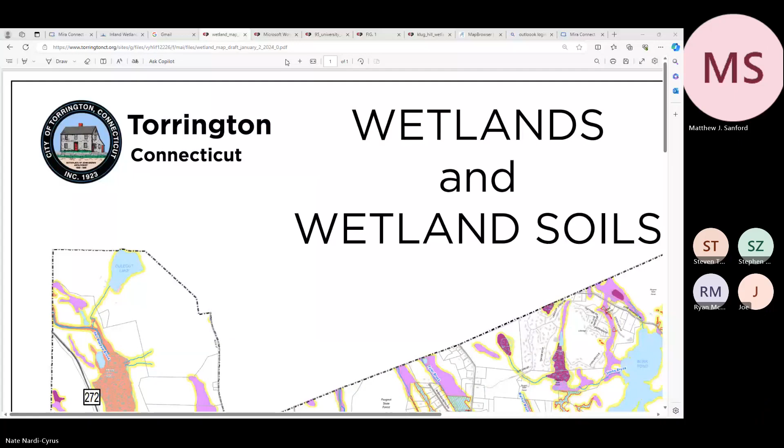This wetlands map has state mapped wetland soils. It also has wetlands mapping done by private consultants that were digitized into our wetlands layer, and the upland review area digitized in yellow as a 100 or 75-foot buffer. So this is the total regulated area of the municipality.

Nate, we could previously see it online, but we can't now. If you can show us after, then we can take a look. I'll figure out how to share it. It's been changed, could be anywhere. Can you see it there? Yeah, that's it. If they can see it, we can. I'm going to fix that. We can discuss it. Have we seen it? Yeah.

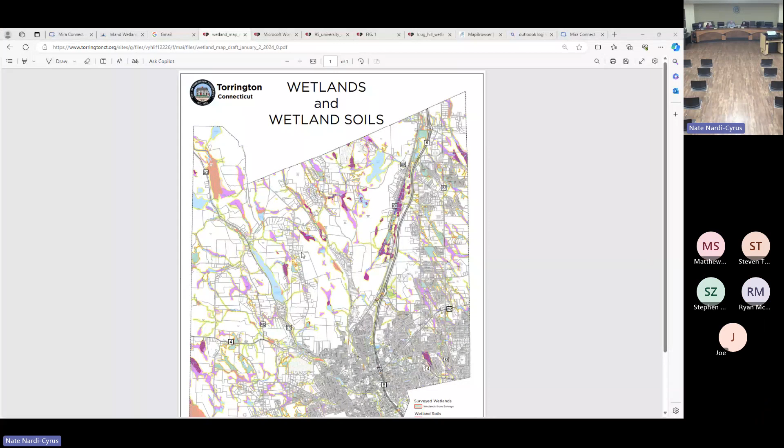How much has been changed on it? There's just been a few updates. We've added the larger wetland mapping done for the Klug Hill campground on these two parcels here. As we go through documents in the land use office, we refer it to our GIS department and they hand digitize using those original maps. There's quite a few smaller ones - these little tiny ones here, to give you an idea of the scale. But it's just a few, I can't think of any others.

How often do they have to be updated? It's good to do an annual update just to get everything on our official map, but sometimes it goes a few years before they're updated.

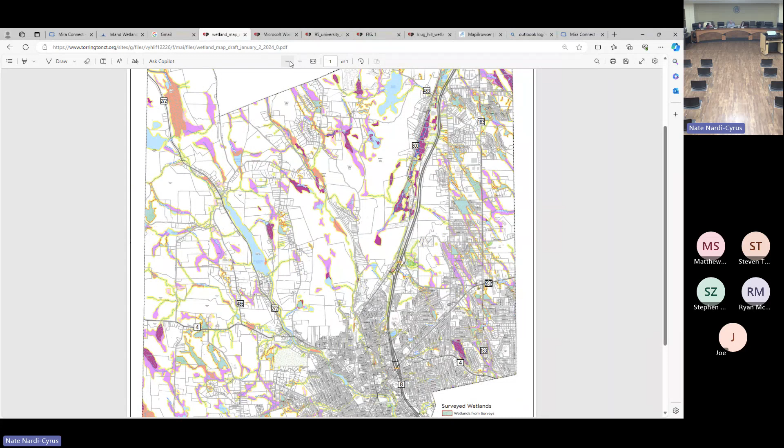Any comments from anybody at all? Okay, can I have a motion to approve? Do we have to close the public hearing first? Yeah. I move that we close the public hearing. Second, all in favor? Christine, aye. Adrian, aye. Joe, aye. Randall, aye. Stephen, aye.

Now can I have a motion to adopt the new map? I move that we adopt the new inland wetland map for City of Torrington. Second, all in favor? Christine, aye. Adrian, aye. Joe, aye. Randall, aye. Steve, aye. Motion carries. That's all set.

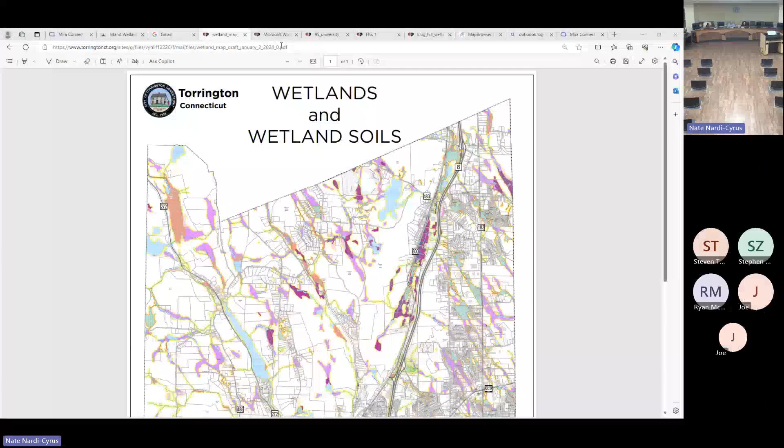Next is old business: Applicant Alfano Group LLC, location 87 Eagle Ridge, activity modification to redesign approved restoration plan. Mr. Alfano came to the last meeting in January and presented a modification changing boulders, used as a demarcating area for the wetlands, to native shrub plantings. There weren't any questions from the commission, and in my memo I was supportive of it. This is just an amendment to an existing permit - the rest of the existing permit prescribing plantings within these areas and signage marking holds, but this is a modification replacing boulders with native plantings. I don't think we had any issues with it. I guess the question is what's going to happen to the boulders now?

Okay. I don't have any problem. Anybody else have any comments?

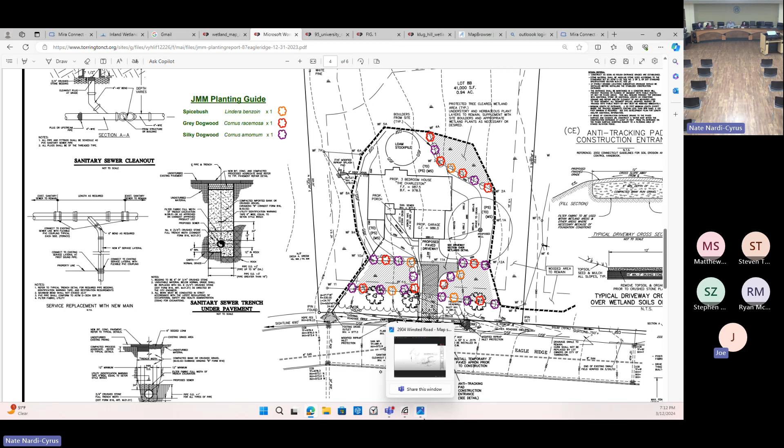I have a motion to approve. I move that we approve the Alfano Group LLC, 87 Eagle Ridge, modification to redesign approved restoration plan. I'll second that motion. Joe, I think Joe's trying to say something. I just said I'll second that motion.

Okay, all in favor? Christine, aye. Adrian, aye. Joe, aye. Randall, aye. Stephen, aye. Motion carries.

Next, old business. Applicant James Mazzarelli, location 137 Babbling Brook Road, assessor map 221, block 003, lot 054. Activity: piping of 130 feet of water course, creation of armored ponds before and after pipe stream, and backfilling of adjacent wetlands to extend lawn.

This is a clarification of motion conditions. This was approved using a specific map that the commission went back and forth on a few times, but ultimately decided on a specific map to approve. The only thing I wanted to bring back to the commission was that we didn't specify the conditions in the memo I provided, which include a shortened time frame, usually recommended for restoration activity, a 2-year permit, and the marking of those wetlands with markers. The commission didn't say that shouldn't be the case, but I wanted to get a clarification on the record of what everyone was looking for, and whether they wanted those specific conditions in the memo.

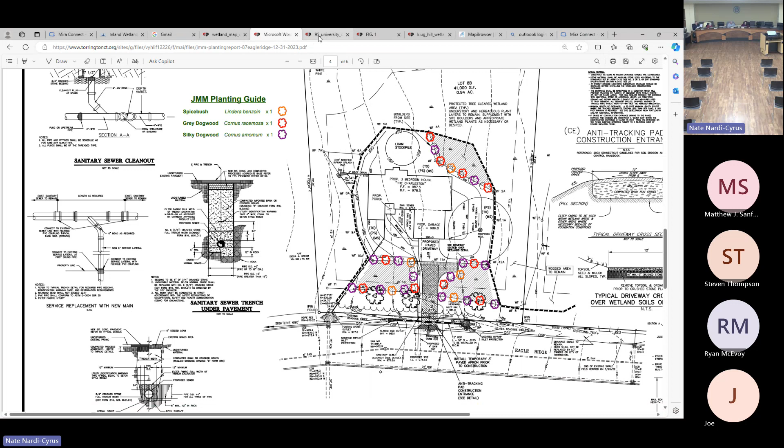Next, new business: the Torrington Water Company, location 95 University Drive, jurisdictional determination for restoration of banks at the dike at Allen Dam Reservoir due to 2023 flooding.

This is a jurisdictional determination for the Torrington Water Company. They had a washout shown here on the map. You can see where the stream takes that 90-degree turn, and it jumped the 55-foot existing masonry wall, washing out sections and undermining the berm that holds this drinking water reservoir for the Torrington Water Company. My recommendation is to determine that it's an as-of-right utility use exempted from permitting from inland wetlands.

I move that for applicant Torrington Water Company, 95 University Drive, jurisdictional determination for restoration of banks at the dike at Allen Dam Reservoir due to 2023 flooding, is an as-of-right use.

Have a second? I'll second that. Joe, two seconds. Okay, all in favor? Christine, aye. Adrian, aye. Joe, aye. Randall, aye. Stephen, aye. Motion carries.

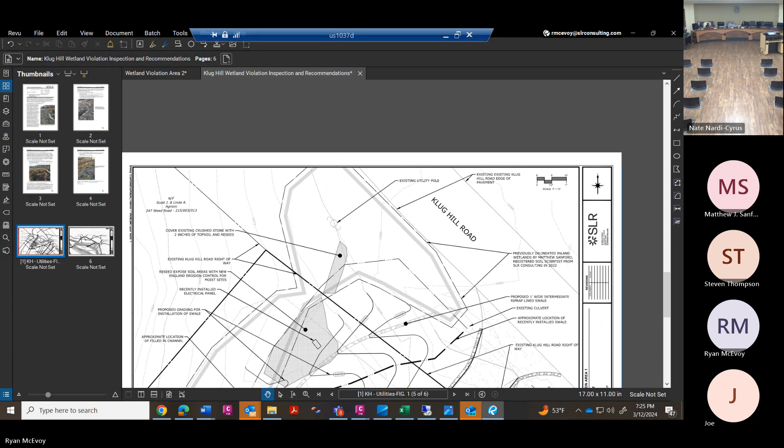So the second area is a little more straightforward. This is by Stormwater Basin 310, a little to the west of the site, centered to the property overall. The silt fence was placed in the wrong location, partially in the wetland area. As part of this corrective action, we relocated the silt fence, upgradient of the wetland areas. There wasn't any soil disturbance in that area.

There was some vegetation removed, but no soil disturbance. So this one was really just moving the silt fence out of the wetland area and leaving the vegetation that's in place to grow.

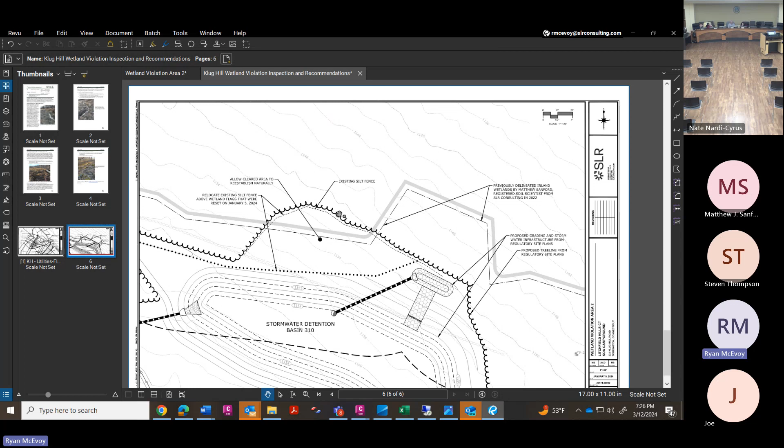And lastly, there is an area that had some S&E erosion problems, downgradient of a basin. There wasn't an issue with clearing or any intentional site disturbance, but all the rain we had in December and January resulted in a silt fence being overwhelmed and some light areas of sand and sediment deposits occurring in the wetland, which needs to be raked out to remove it from the wetland areas.

So we have Matt Sanford on the call as well, if you have any questions regarding the nature of the wetlands themselves.

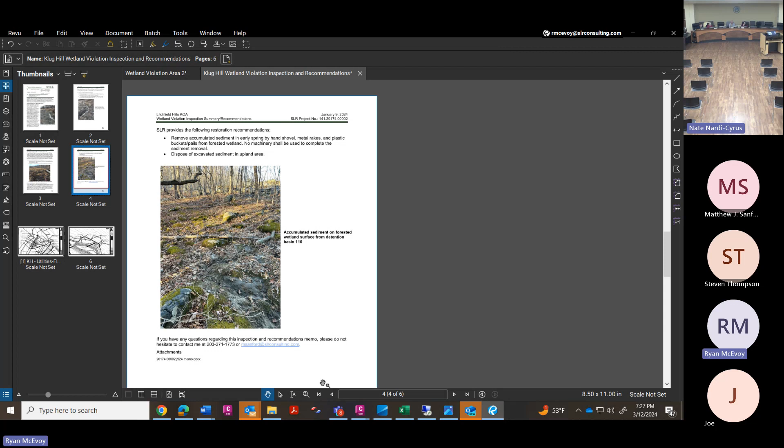Do you have any more pictures? I see this one picture you just showed. Do you have any other pictures of the watercourse?

Yeah, this picture right here in the packet that we submitted is violation number 2, where the silt fence was put too far, in this case to the right. The silt fence should have been a little bit more to the left where my cursor is.

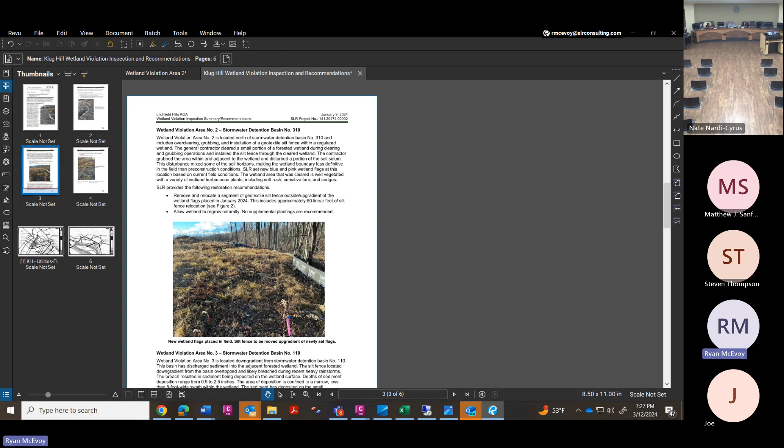So this area hasn't really seen any activity, any grubbing, any soil disturbance. It's really just some trees that were cut down that were permitted to be cut down. And in the area of the

watercourse that was relocated, this represents where the diversion ditch was placed by the site contractor. This is in upland soil areas. And the old ditch was this particular swale over here.

So the ditch, and Matt can go into detail on this, is not being impacted by the relocation of the surface runoff that comes through this area. This is all a groundwater fed wetland area and has contributing groundwater shed from adjacent properties and from the site itself. So the relocation of the ditch in and of itself does not result in any detriment to the actual wetland.

The clearing done or the disturbance of soil for the electrical conduit is proposed to be replaced with topsoil and appropriate seed mixes for the type of vegetation on site.

So what happened with this watercourse? Was the water coming down? Was it disturbed originally, and that's why it came down and washed everything out, and that's why the street department wanted it moved? Well, I don't know if this was historically a problem or not, but this watercourse here comes into an area by the road that doesn't have a lot of grade change.

Is there any reason to believe that after construction is finished, that swale would take on more water flow? No, it's all coming from the same source up-gradient, draining down to the same source down-gradient.

Nate, I'm looking at this map, I'm still a little confused. The dark line is the approximate location of the recently installed swale. And the light one in the middle, farther up, is the proposed one-foot-wide intermediate riprap lined swale. That's correct. So this is the one that was proposed by engineering. So this is the one proposed. That's the one they have now.

City engineering. Yeah. This is the one that was decided on by the site contractor and Public Works. I think it was the street commissioner, but I'm not exactly sure who at Public Works identified this as the place where they wanted it. But when we submitted this application for review, the city engineer suggested a different approach or a different path for this swale. So it's shifted a little bit more.

So you can't really see it too well on the screen, but the ditch today, as it's reconstructed, discharges immediately adjacent to the inlet of the culvert. So I think the city engineer's concern was that this would eventually cause erosion right at the inlet of the culvert, if it's so close to it.

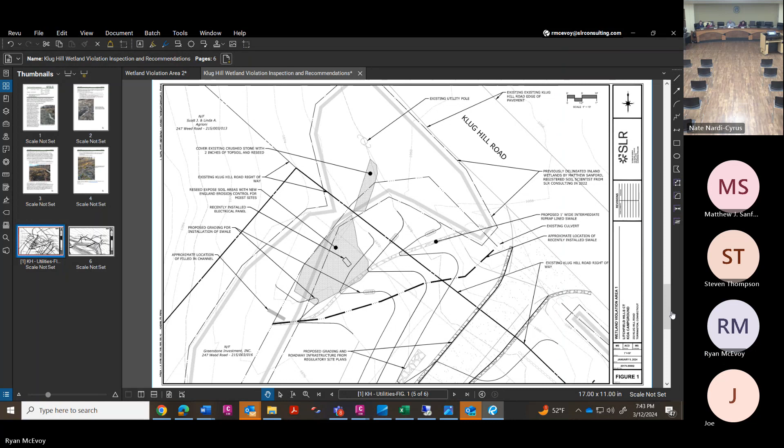Okay, next: cease and correct order. Order to show cause in the wetlands permit violations, location 2904 Winsted Road, assessor map 243, block 002, lot 010. Owner DJF Investments LLC, Daniel Fragale, principal.

This just came up during regular inland wetlands permit inspections. This permit was issued prior to me coming on, but in inspecting, you have on the screen the permitted plan. I noted that the pipe was installed, but the length of that pipe, instead of the 86 linear feet proposed in the plan, was closer to 125 feet. And the compensatory wetlands restoration that was also conditioned with the permit did not appear to be installed. So I issued that just to bring Mr. Fragale back for the commission.

Anyone here on this? No one's here for Fragale to speak on this? I didn't hear anything from the office.

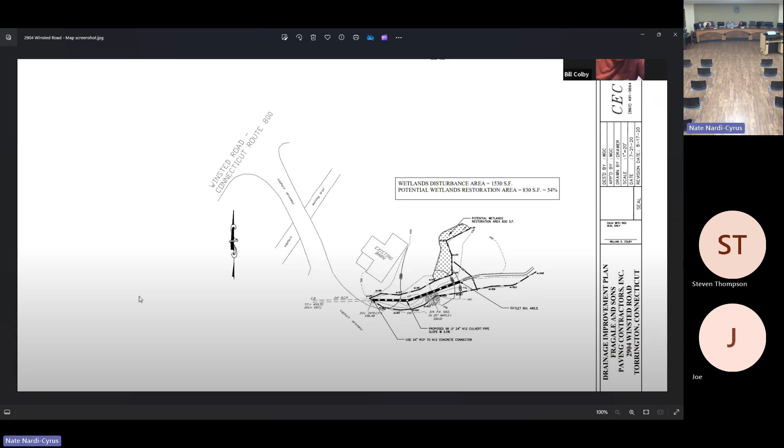Again, this was all kind of extrapolated using mapping, Nearmap or kind of high resolution regular mapping. But also on the site, there's a considerable amount of erosion going on in this area where there's a large sediment pile. In fact, I can show you. Is that pile that's stacked there in the wetlands? Here, I'll show you - can everyone see this? Yep, this is the site.

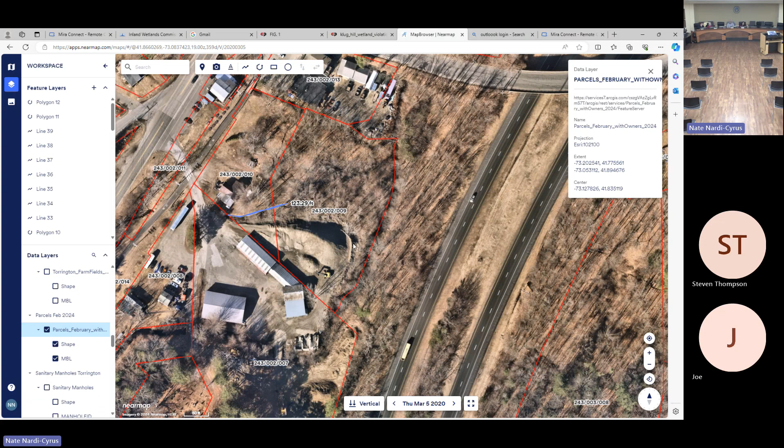Is that a stream behind it? Yeah, so I'll orient you to the site. Let me just pull up the property map. This has a long history to it, and I guess I can go over it. So this is the parcels. This is Winsted Road here. This is Greenwoods Road. This is for Fragale Paving.

Violations going back to around 2000, in which Kim Barberry found that there had been large material stockpiles in the floodway. That's a pretty big violation of our floodplain regulations - no material is supposed to be placed in the floodway, according to Army Corps and our regulations. But it was also a violation of inland wetlands. After years of going back and forth, some of the area was restored, some of it wasn't. A lot of it fell off the radar and it was never completely restored.

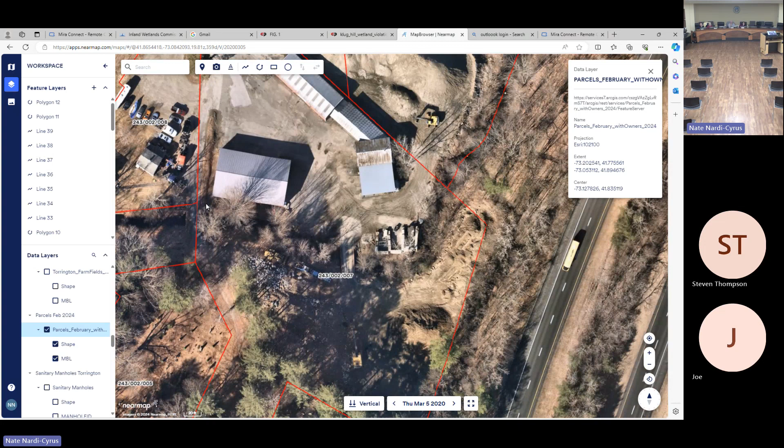Another issue was that these bridges put in, one here and one here, I believe - maybe I'm not seeing it right - but anyway, at least this bridge was put in without permits, and that's also in the floodway there. This is the Still River, so it gets a lot of water in it. So fast forward to 2020, Mr...

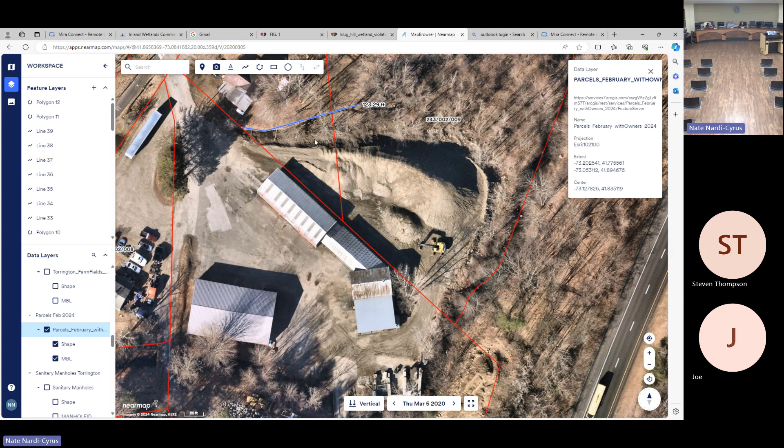Lyford, our current city planner and former wetlands agent, noted issues in this part of the property. As a first step to remediating everything else on the property and bringing this back onto the radar, he required Mr. Fragale to come in and propose a plan for piping this stream so they could access this newly acquired property, because it's kind of a tight spot.

That's when this plan came about, but there are still numerous questions. I'll throw on some of the wetlands layers so you can kind of see.

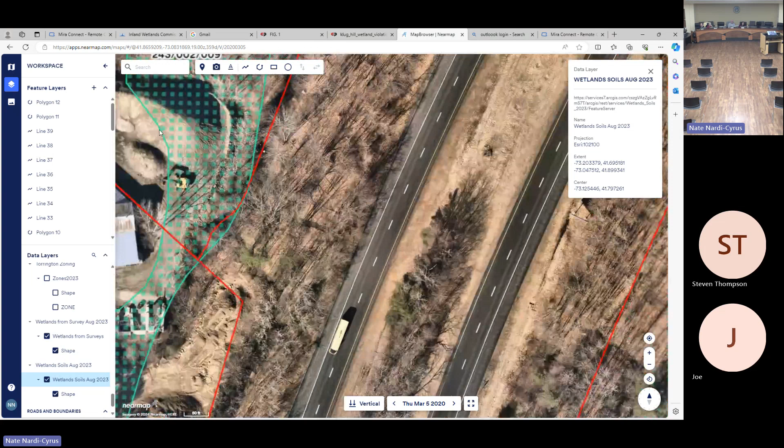This large stockpile in this area was supposed to be removed as a condition of the last permit, and it still remains. This is from March of 2020. Let's see what it looks like now.

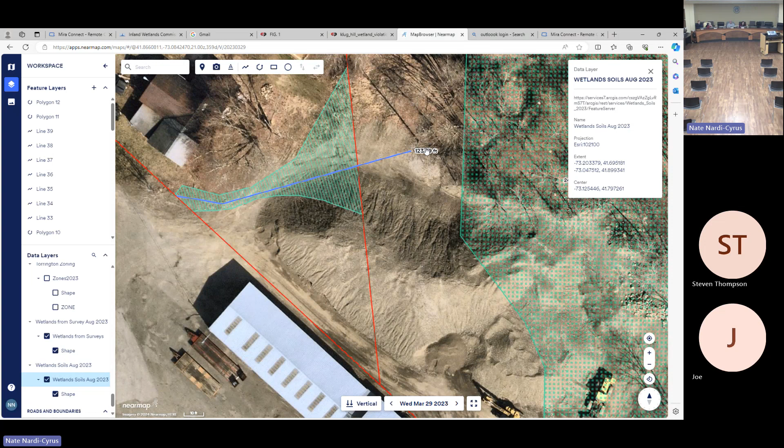They filled in, and you can see that area was piped well beyond the 90 feet shown in the permit. The stockpiles actually moved into that area of former wetland and expanded here. The bridge is still there as well, and there are other stockpiles on this side of the road that were not permitted. So there's a lot going on and it's kind of hard to wrap your arms around.

My recommendation to the commission would be to require Mr. Fragale to come in and map all the wetlands on the property and the floodplain, get a permit showing how he's going to correct that, and then take next steps from there.

Yeah, it sounds good. I was on the commission when we had all the problems on the other side where it was stockpiled. It looks like they got rid of those stockpiles, just moved them across, but there always was a stockpile pretty close to where that one is now. There always seemed to be one in that general area. When I go by, I always see it.

Yeah, it's all unsecured sediment, and it's clearly right here, you can see the wetland. This was all mapped wetland area in here and it appears like wetland, and it's actively flowing into that area. No fencing, just rills coming all the way down the pile into the wetland.

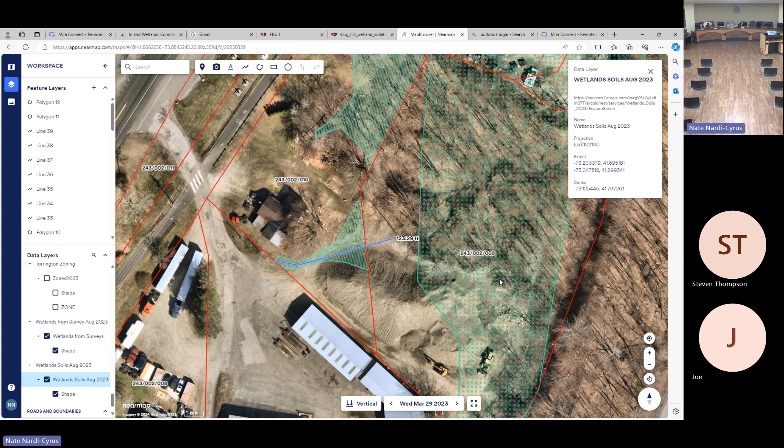Do we need a motion? I think to follow up with enforcement, the motion would be to revoke the permit because of violation of that permit. Then I would follow up with enforcement, try to contact them, and take next steps from there, bringing it back to the commission if it has to go to legal action.

I move that we revoke the permit for the location 2904 Winsted Road, Assessor Map 243, Block 002, Lot 010, for DJF Investments LLC, Daniel Vergale, Principal, and uphold the cease and correct order.

I have a second. I'll second that motion, it's Joe. Okay, Joe seconds. All in favor: Christine, aye. Adrian, aye. Joe, aye. Randall, aye. Stephen, aye. Okay, motion carries.

Takes care of that. Next is staff report, enforcement update. I don't have any specific enforcement items to bring up, but I do have good news in that the citation ordinance was referred to council, and then to the citation ordinance subcommittee of council, and they approved sending it to council and scheduling a public hearing. I believe the next council meeting that would legally allow it is going to be the public hearing for both that and the ordinance modification.